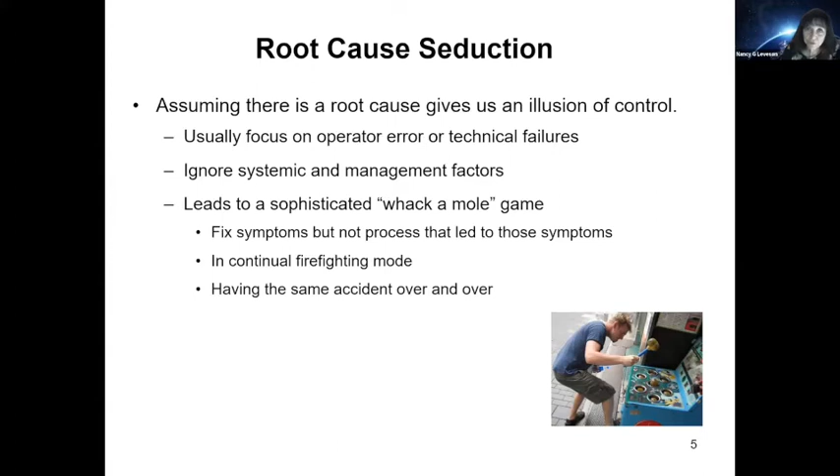And what that leads to is a process where we fix symptoms, but not the real cause of those symptoms. So we're in continual firefighting mode. We're continually putting out fires and having the same accident over and over again. In fact, in any accident, there's almost always operator error, flawed management decision-making, flaws in the physical design of the equipment, safety culture problems, regulatory deficiencies, and flaws throughout the safety control structure.

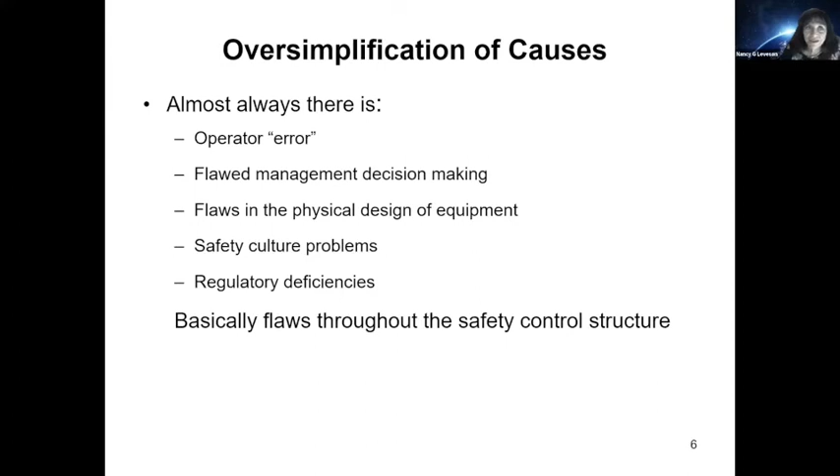And of course, you're probably all familiar with that because so much attention was focused on the Fukushima Daiichi nuclear power plant accident and all the things that went into it. And just blaming that on an operator or on the failure of the power to come on misses the most important factors, which were cultural, government, and other kinds of flaws.

There was a man, Jerome Lederer, who is considered the father of aviation safety. And he said that system safety covers the total spectrum of risk management. It goes beyond the hardware, and it involves the attitudes and motivation of designers and production people, employee management rapport, the relationship of industrial associations among themselves and with the government, human factors in supervision and quality control,

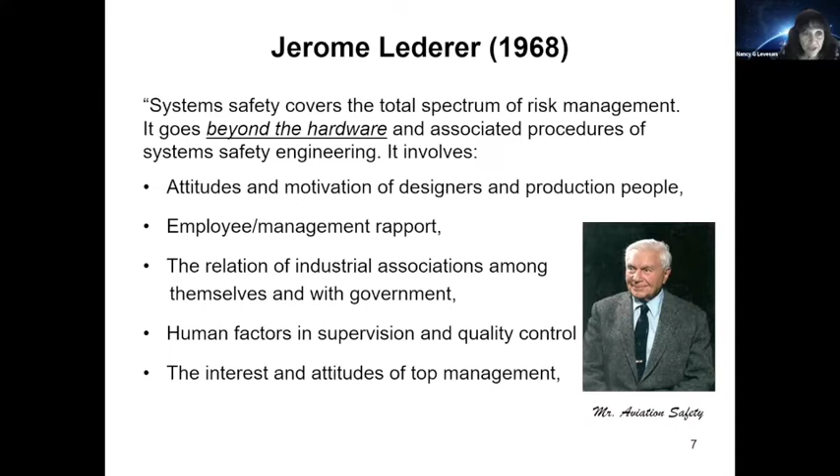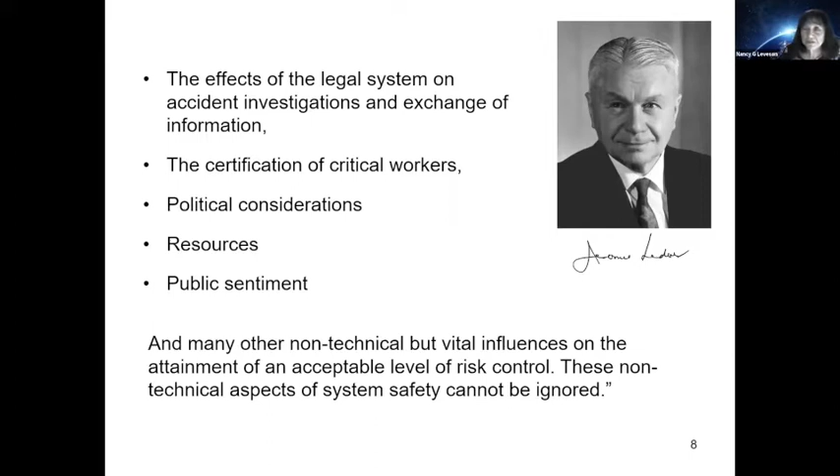the interest and attitudes of top management, the effects of the legal system on accident investigation, the certification of critical workers, politics, resources, public sentiment, and many other non-technical but vital influences on whether we are able to gain an acceptable level of risk control. And it's very important that these non-technical aspects not be ignored, or we will not be able to prevent accidents. There's also something called hindsight bias.

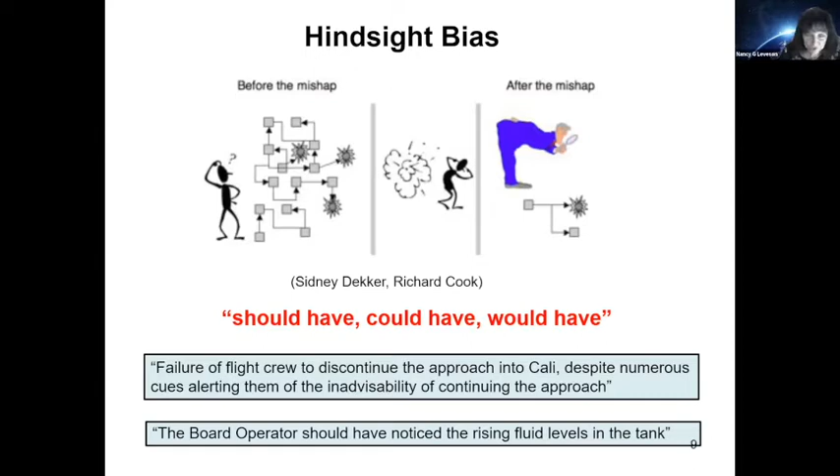So after an accident, it's very easy to see where people went wrong, what they should have done. It's easy to judge people for missing a piece of information that later turned out to be critical. Easy to see what people should have seen or avoided, but it's almost impossible for us to go back and undo what we know in our mind, understand how the world looked to somebody that doesn't have knowledge of the outcome. So to learn, we need to identify not what people did wrong. That gives no useful information. We need to ask, why did it make sense for people to do what they did?

Most people, 99% of people, do not get up in the morning and say, oh, good, I'm going to work. I'm going to kill myself and other people today. They're all trying to do the right thing. Everybody is trying to do the right thing. So the question we want to know is, why did it make sense to them at the time to do what turns out in hindsight to be the wrong thing?

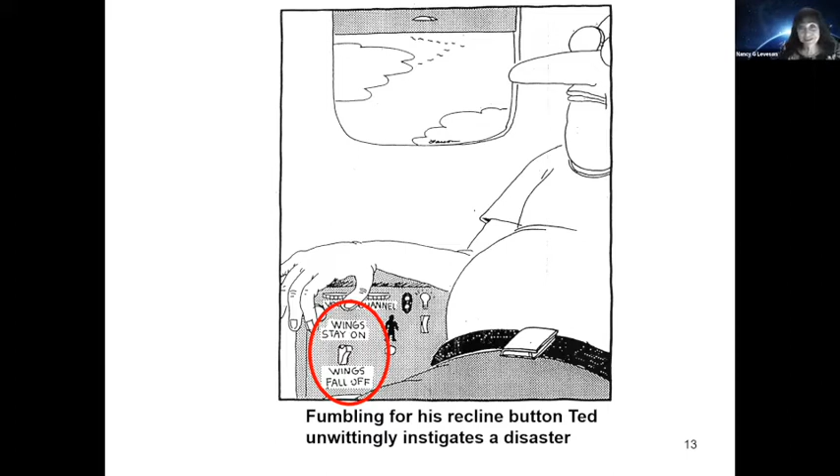The new systems view of operator error says that operator error is a symptom. It's never a cause. All behavior is affected by the context in which that behavior occurs. But the role of operators in our system is changing. They're supervising rather than directly controlling. They're supervising automation. Systems are stretching the limits of comprehensibility. They're so complex that even the engineers don't understand them all. So why would the operators be able to? We are in fact designing systems in which operator error is inevitable, and then we blame the accidents on the operators rather than on the designers.

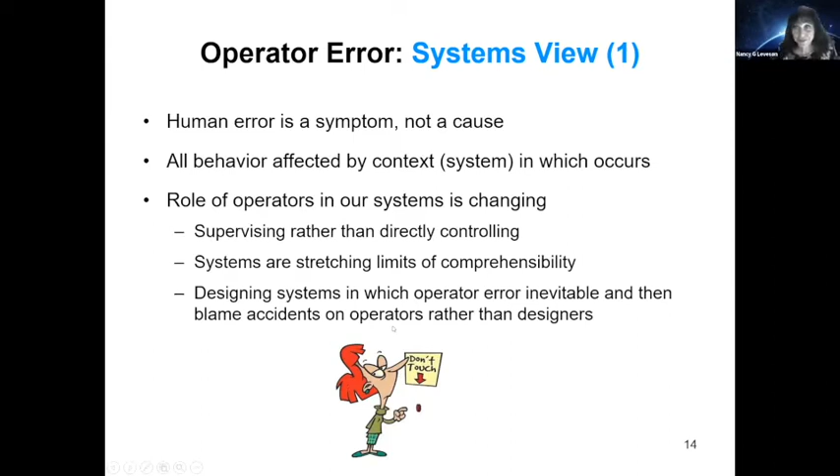So to do something about error, we need to look at the system in which people work: the design of the equipment, the usefulness of the procedures, the existence of goal conflicts and production pressures. In fact, I conclude that human error is a symptom of a system that needs to be redesigned.

Here's another example of an accident report. This was the Cali aircraft accident. Failure of the flight crew to revert to basic radio navigation at the time when the flight management system, that's the software-assisted navigation, became confusing and demanded an excessive workload in a critical phase of flight. Do you see what's being said here? It's the flight crew's fault for being confused, instead of the fault of the software for being confusing.

That doesn't make much sense. It is not going to solve our problems because the flight crew died, and we can't punish them. It doesn't make any sense. We need to fix the navigation software.

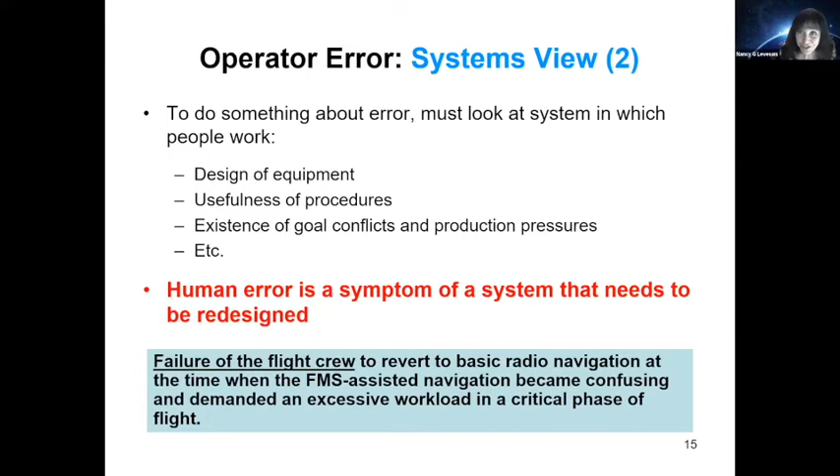In fact, blame is the enemy of safety. The goal of courts is to establish blame. The problem is when you focus on blame, people stop reporting errors, information is hidden, everybody points at everyone else. It's someone else's fault, not mine.

I can't get this to work on my screen.

Learning is inhibited. And so while it may make us feel good to find somebody to blame, we don't learn when we do that. The goal of engineering is to understand why accidents occur in order to prevent them. We need to leave blame to the courts, to the legal system, not engineering. It doesn't help us to find blame.

There are two possible goals in any investigation. We can identify someone to blame, or we can find out why the accident occurred. The first I call the accusatory approach. We focus on who and why they did what they did. To find out why an accident occurred, we need to look at what happened in the accident and why, and not to focus on who or who to blame.

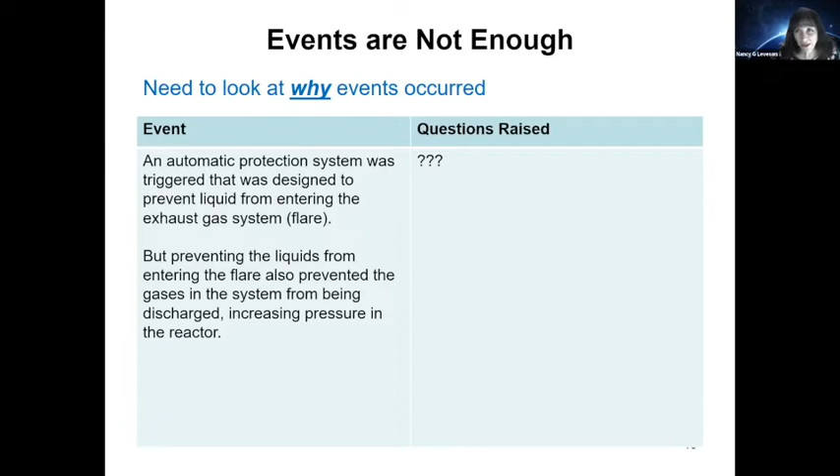There are all kinds of questions that arise. Did the operators notice this? Was it possible to detect this? Did their instruments show any of this information? Why didn't they respond if they did know? This seems like a predictable design flaw.

Was the unsafe interaction between the two requirements, preventing liquid from entering the flare and the need to discharge gases to the flare, identified in the design or hazard analysis efforts? If it was identified, why wasn't it handled in the design or in the operational procedures? If it wasn't identified, why wasn't it identified? It's an obvious flaw and an obvious hazard.

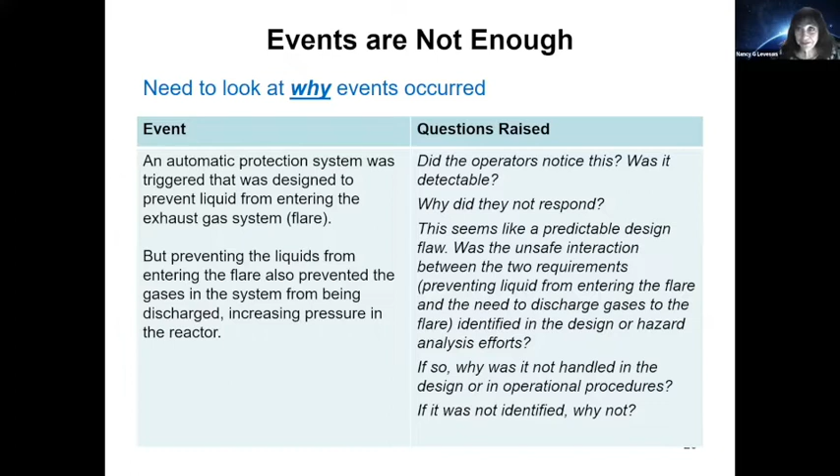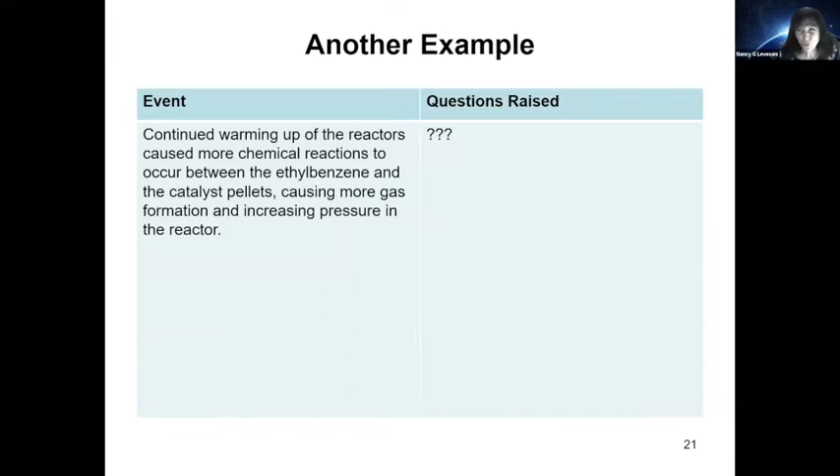Here's another example from the same accident. The event was that the continued warming up of the reactor caused more chemical reactions to occur between the ethylbenzene and the catalyst pellets, causing more gas formation and increasing pressure in the reactor. Again, that's just what, but it doesn't tell us why. So we need to answer these kinds of questions.

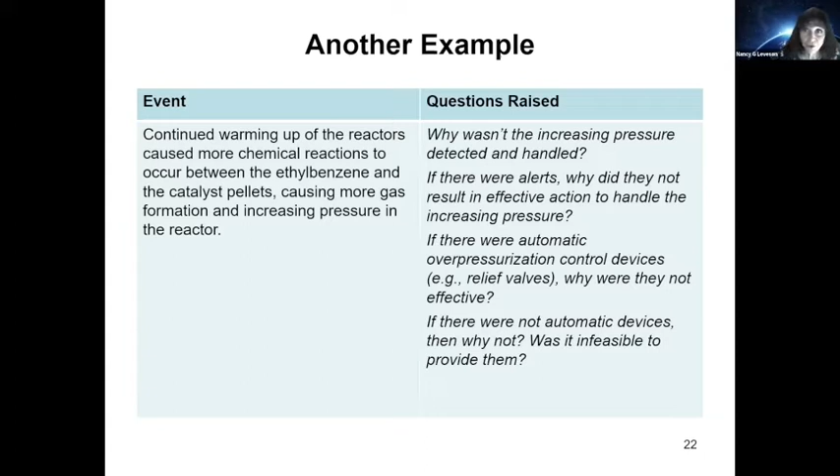Why wasn't the increasing pressure detected and handled? If there were alerts, why did they not result in effective action to handle the increasing pressure? If there were automatic overpressurization control devices, for example, relief valves, why didn't the relief valves work? If there were not automatic devices like relief valves, why weren't they included in the design? Was it not feasible to provide them, or did someone just make a mistake? Those are the kinds of questions we need to answer.

Let me give you an example of a real accident. This is a workplace accident. It was a large manufacturing plant, a company manufacturing large things. I can't give you the details, but they were assembling a large complex product. There was a specific part that wasn't available when they needed to put it in, so a decision was made to add it later and not slow up production.

The part finally did arrive, but to get that part into this thing they were assembling, they had to disassemble a large piece of the product. So how could they do that? Well, they needed scaffolding. So they had some scaffolding created during the shift before this one. And when they went to remove that large piece to put in the new part, the scaffolding kept it from being removed.

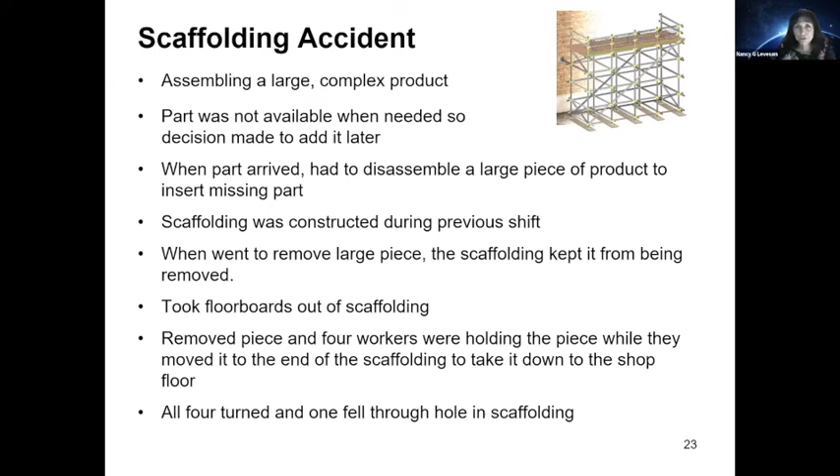They couldn't take off that part, that big door. It was actually a big door. So what did the workers do? Well, they took floorboards out of the scaffolding so they could open the door. They removed that piece, and 4 workers were holding the door, the piece, while they moved it to the end of the scaffolding to take it down to the shop floor. All 4 turned and 1 fell through the hole in the scaffolding.

So the company accident report used a causal analysis tool, really useless thing that lots of people use and probably many of you use. And it came up with the answer. The error was that the workers stepped in a hole. Well, that's pretty obvious. We know that. Why? Well, they said they made a mistake and they had a lack of situational awareness. Well, of course they made a mistake. They stepped in a hole.

That's a mistake. The lack of situational awareness basically is just fancy language for saying they didn't know that the hole was there. Well, of course they didn't know that the hole was there. They wouldn't have stepped in it if they'd known it was there. So clearly this is not useful. This is providing no useful information except that we can blame the worker, which is what they did.

They identified the root cause as worker error and the lack of experience in doing the job. They hadn't done it before. They didn't know there was a job aid for this job. And they didn't perceive any unusual risk and didn't ask for help. The recommendations then, and that's all the accident report said.

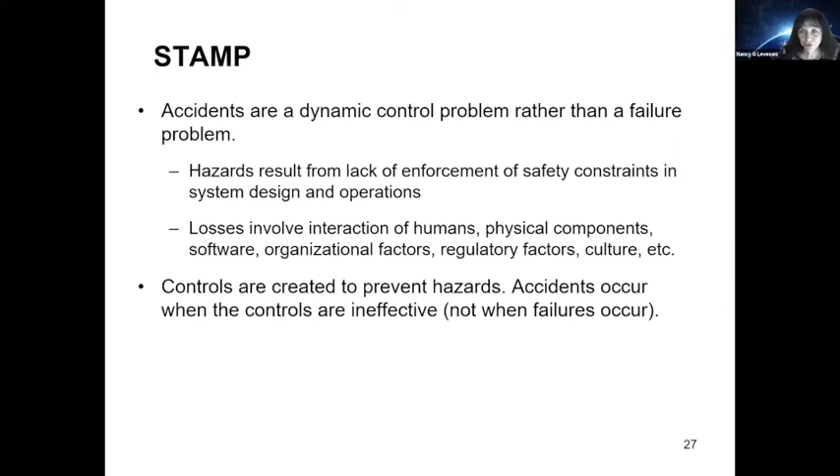Controls are created to prevent hazards. Accidents occur when the controls are ineffective, not when failures occur, but when we don't have controls for those types of failures. So CAST is an accident analysis method to help increase learning from accidents and incidents.

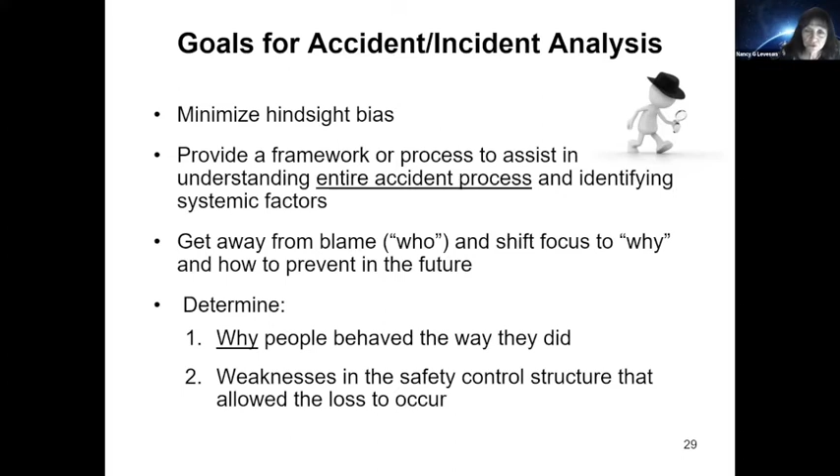Its goal is to minimize hindsight bias, to provide a framework or a process to assist in understanding the entire accident process and identifying systemic factors, not just providing an excuse to blame the operators. It tries to get away from blame, who, and to shift the focus instead to why and how to prevent it in the future. We need to determine why people behaved the way they did and the weaknesses in the safety control structure that allowed the loss to occur.

It's a structured technique that helps to generate the questions to be asked. And it's a change from what we do now. The goal is not to start to look for failures or human error. The goal instead is to ask, why didn't the designed controls prevent the accident? We all try to prevent accidents. There are lots of controls provided, government oversight, there are rules, there are all kinds of policies. Why weren't these effective? And what changes are needed in the controls to prevent future accidents?

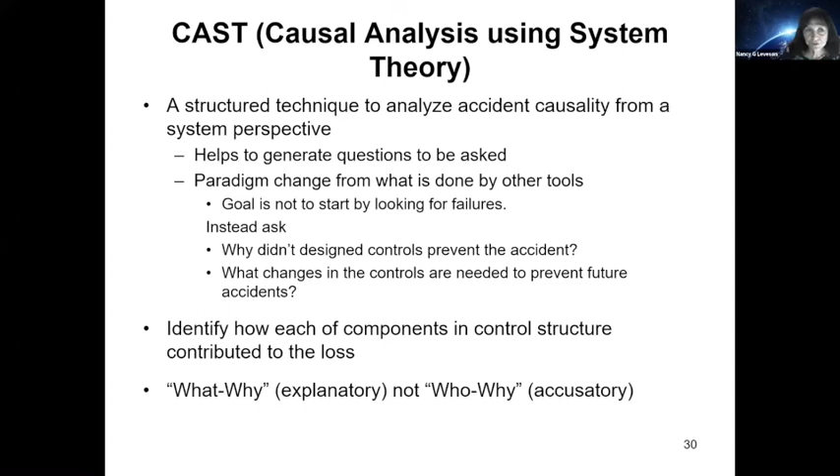We need to identify how each of the components in the control structure, everybody involved, contributed to the loss. And I already said the last one. So there's 5 steps in CAST. It is a structured process with a set of steps, and you go through those steps and then get the answer. So you need to first figure out where the system boundary is, what hazards, what constraints, what events did happen. We do need to start from events, what the physical loss was, and so on.

Then we build a model of the safety control structure, how accidents are controlled, and then analyze each component in the loss, the contributions to the accident, what mental model flaws. Humans have models in their heads of what they think is going on. And accidents often occur when the mental model is different from the actual, real physical system. We need to look at the context in which decisions are made and again, generate questions.

Then we need to identify the control structure flaws, and that may involve communication, coordination, the safety information system, the culture, the changes and dynamics in the system that have occurred, economics, environmental constraints, and so on. And we actually do have, if you're interested, one of my Japanese students did a CAST analysis of Fukushima Daiichi. And what you find is that the whole structure of the nuclear power system and controls in Japan were flawed. And of course, you know that lots of changes were made after the accident. And then at the end, you create an improvement program with recommendations and feedback.

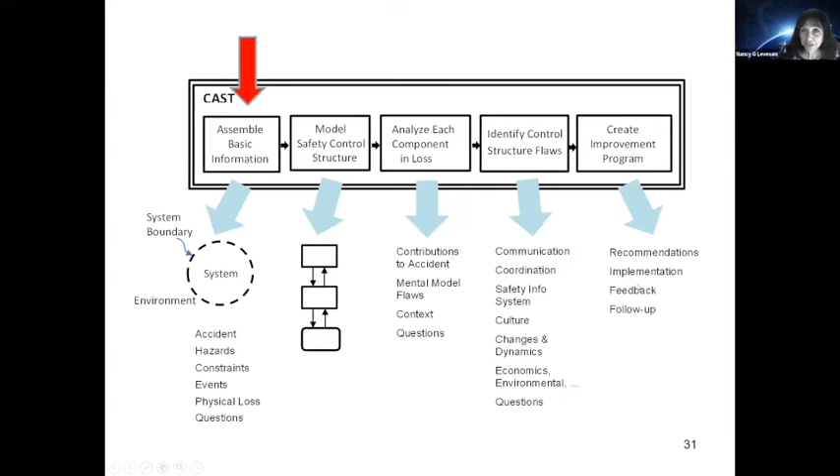So I don't have time to go through all the details, but this is an accident in a chemical plant. This is the one I was talking about. It was a Shell plant in the Netherlands. And there is a chemical process here, and above it there was an automated process control system. There were also operators who were interacting with the automated system, but also controlling the chemical process directly. There was safety management in the plant.

There was plant operations. Above them, Shell Global has Projects and Technology, which actually designed this plant. They have safety management. They have above, like any company, executive management. At the same time, there was oversight in the Netherlands. The government agencies oversaw operations in the plant. And above them is the European Union, and they have rules and procedures. The oversight agencies also oversaw emergency management, state and local emergency management and public health, which, here's a picture of the explosion, went into effect after the accident.

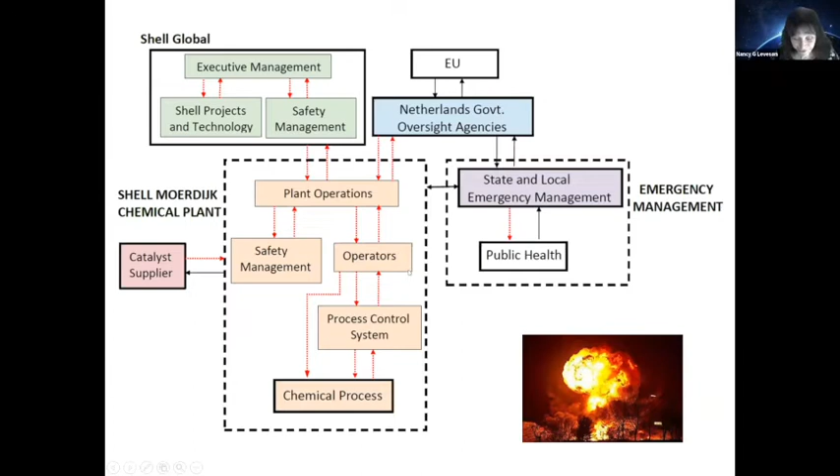And in fact, if you look carefully at the accident using CAST, you find that every single one of these things contributed to the accident. And though the operators are mostly blamed, they had the least impact, in fact, on the actual accident cause.

So we start by looking at the hazard, exposure of public or the workers to toxic chemicals, and the constraints that must be enforced. The workers and public must not be exposed to potentially harmful chemicals. Measures must be taken to reduce exposure if it occurs. Means must be available, effective, and used to treat individuals inside or outside the plant.

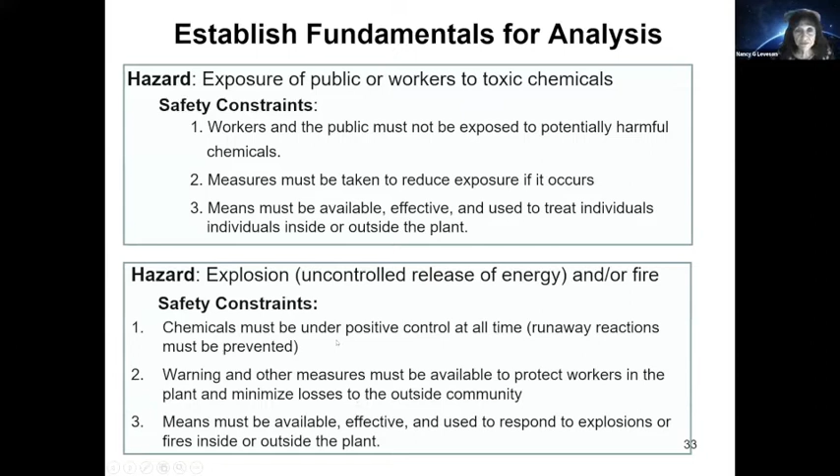A second hazard is just explosion or fire, and chemicals must be under positive control at all times. There must be warning and other measures available to protect workers in the plant and minimize losses to the community. And there must be some means to respond to explosions that actually occur.

In CAST, there's a format that you look at, and you take each component of the system, like the process control system or safety management, and identify their responsibilities, the unsafe control actions that occurred, what did they do that contributed to the accident. But then we don't stop there. That's where most people stop, we say they didn't do, or they did X and it led to the accident. But that's only where we start in CAST.

We also have to look at the context. Why did that behavior occur? What were their mental model flaws? What did they know in their minds that caused them to do the wrong thing? There has to be a reason they did the wrong thing. Everyone in this plant wasn't negligent and unskilled. They were very highly skilled.

And for the control structure as a whole, we have to look at what happened with coordination and communication between the different components. What about the industrial and organizational safety culture? How did that impact this accident, contribute to it? What about the safety information system?

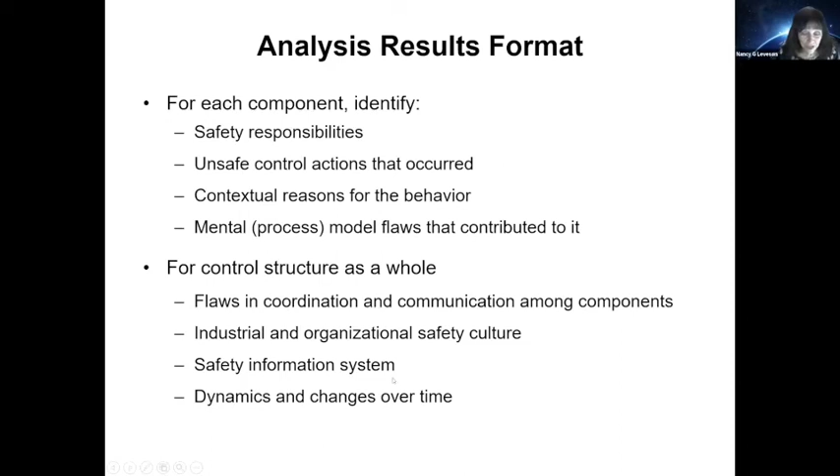It turned out that they had assumed that this accident wasn't possible. So they gave it a probabilistic risk assessment of 0. Couldn't happen, except it had happened twice before in Shell plants, actually in Southeast Asia. What? If it happened twice before, it can't be 0. But they assumed 0, so they didn't try and prevent it. That's crazy. Something is happening here in terms of getting information around the company that needs to be distributed. And there were dynamics and changes over time.

So as I said, there were inadequacies found throughout the safety management system. In the physical design, there weren't the right kinds of relief valves. You saw at the beginning, they had the flare closed to prevent liquids from getting into the flare, but that also prevented gases from getting in. You saw those. The process control system, the automated system, turns out was designed not to handle this kind of problem.

The accident occurred during a startup, after a turnaround, after a large maintenance action. They start restarting the plant. And it turns out that is when most accidents occur in chemical plants, during startup or during shutdown, but mostly startup. The process control, the automated system, was purposely programmed not to help the operators during the startup, which is the most difficult time. Why? I never could figure out why.

The operators acted appropriately, or at least understandably, given the context that they had. They had incorrect work instructions, which they followed. Workers are blamed if they follow the instructions, even though the instructions are wrong. That's ridiculous. Why were the instructions wrong? They were not trained to do a startup. There's required skill and knowledge in doing a startup by the rules of the company. None of them had those skills and knowledge. They'd never done it before, but nobody provided them with assistance from somebody who had done it before.

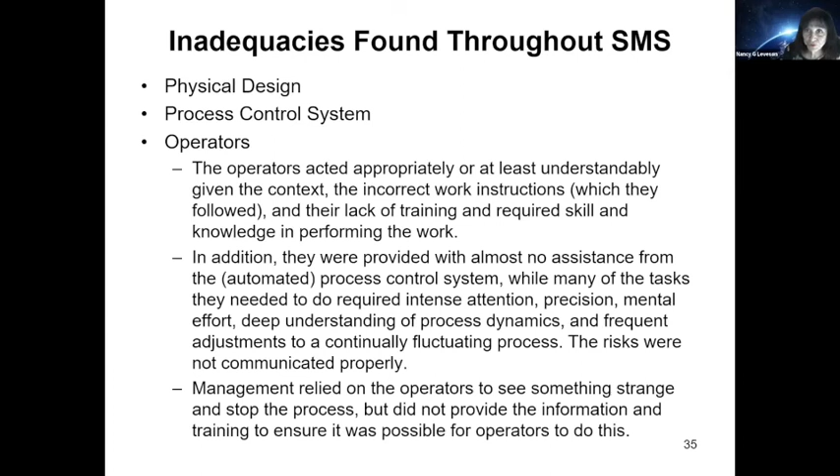So there were problems in the plant safety management. They were the ones that assumed it was zero risk, and then said, well, my probabilistic risk assessment is zero. There were problems in operations management, in the Shell designers, in Shell management, corporate management, executive level management, in the manufacture of the catalyst, which reacted badly to the ethyl benzene.

Dutch regulators didn't provide oversight because this plant had been so good in the past, they didn't think they needed to provide oversight during this very dangerous operation. Emergency services actually worked pretty well. They were the one group that actually did their job pretty well. And there were flaws in the interactions among it.

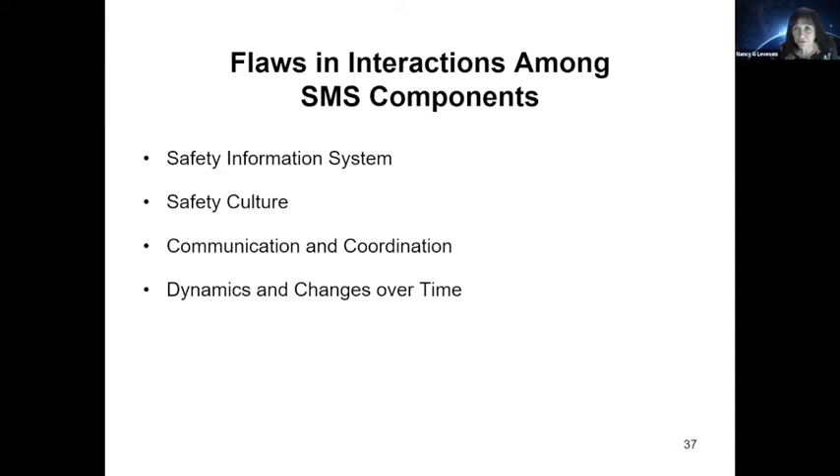As I said, the safety information system was incorrect, the information that Shell had about safety. The culture was very flawed. There were communication and coordination problems. There were changes over time, which there always are before accidents. So unless we understand this whole thing and all of these factors, if we just blame the operators, we don't learn anything.

The model we use in accident or incident analysis determines what we look for, how we go about looking for the facts, and what facts we see as relevant. This linear chain of events model promotes looking for something that broke or something went wrong in the sequence of events. They usually identify the point where an operator error, supposed error in hindsight, occurred, or something physically broke, as in this case.

So they blame the operators when the operators in this accident were probably the least responsible for it. Unless we look further, we limit our understanding, and we almost guarantee that future accidents related to the same factors are going to occur again. The symptoms may be different. It may not involve a catalyst and ethyl benzene the next time. So we don't see that this is actually the same accident with just different symptoms. The goal should be to learn how to improve the safety controls and not to find someone or something to blame.

And we need to use accident analysis processes like CAST that avoid root cause seduction and oversimplification, that minimize hindsight bias, that are explanatory rather than accusatory, and that emphasize a broad contextual view of human behavior. Why did the person think it was the right thing to do at the time? So CAST provides this structured process for learning more about accidents. It helps you generate the questions that need to be answered during the investigation and identify the information that needs to be obtained. So that's my talk about CAST.

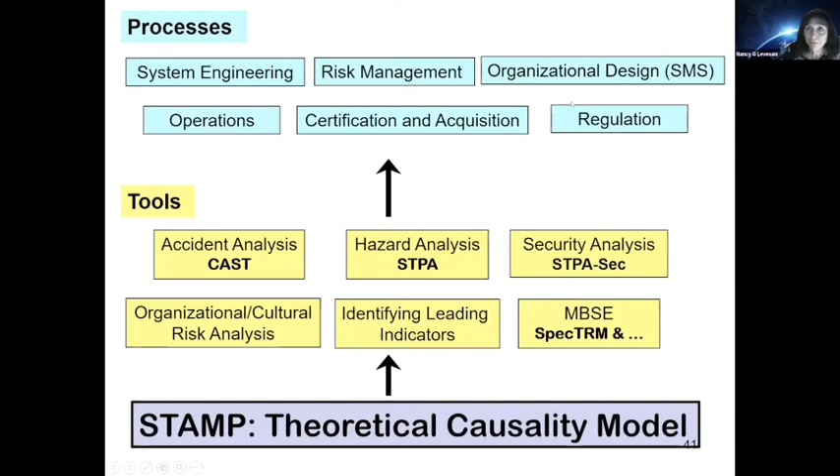I want to make a couple comments because I find a lot of confusion in the world. So let me explain some of the confusion I see. A lot of people, oops, that should have been CAST, think that you should combine STPA and CAST, or STPA with additional analysis techniques. And so they propose, well, we should do STPA and fault trees, or STPA and failure modes and effects criticality analysis, or STPA and whatever, attack trees, which are just fault trees.

The problem is that, in fact, if you look at it, we can show this empirically, I can show this mathematically, and we can show this actually in practice. The STAMP-based analysis tools are much more powerful than the traditional analysis tools.

So the scenarios generated by STPA are more than the scenarios generated by the old traditional hazard analysis. It makes no sense to spend a lot of resources. In fact, they're more expensive to do the traditional ones, to waste a lot of resources to find the same things that you would find with STPA. It's just a waste of resources. You can do it. I don't care. I just don't want people to waste their time and energy, because then you can't do as good a job. So it makes no sense.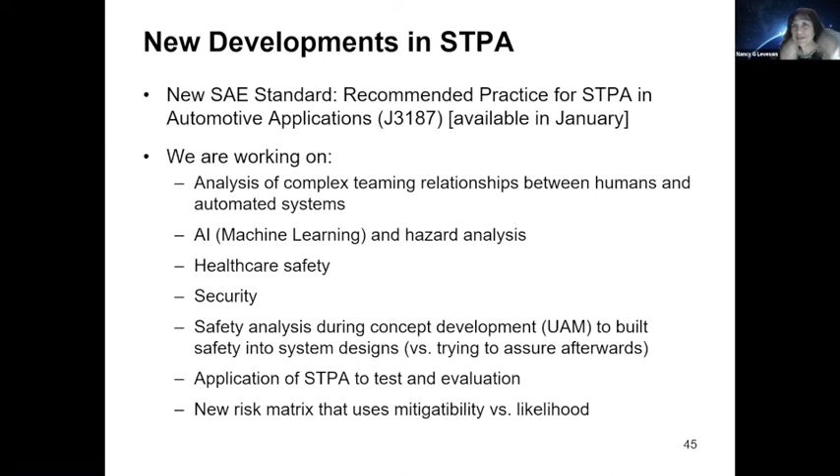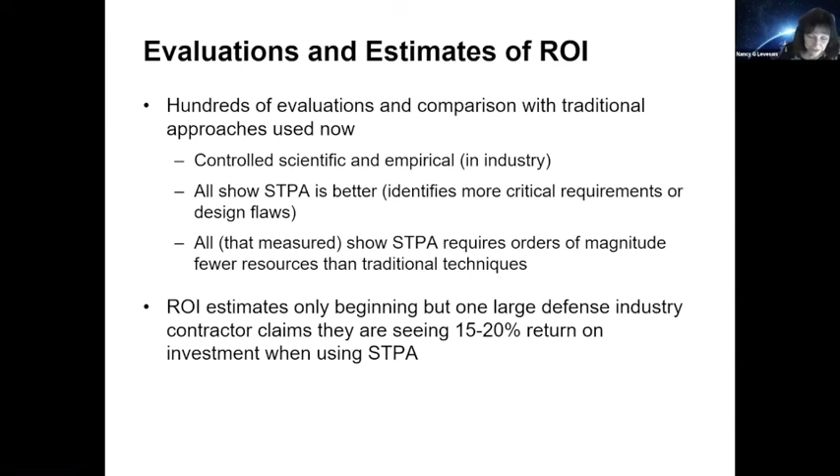We're only now starting to see return on investment estimates. Companies don't like to report these, but one large defense industry contractor claims that they're seeing 15 to 20% return on investment. That's 15% to 20% of the entire cost of the program when they use STPA. Why? Because you find errors early and you don't put them into the design. You design a safe system from the beginning. Much of the cost of development is in trying to back up. When you find an error, you have to go back, and that's astoundingly expensive. So you want to find things as early as possible.

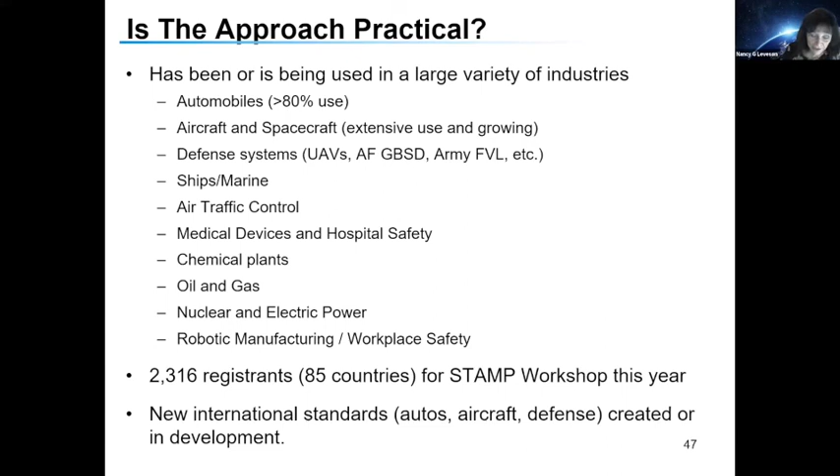In our last STAMP workshop last June, we had 2,316 registrants from 85 countries. This is now being used by thousands of people. It is not just a university, my little thing. It is now being used everywhere, and there are new international standards, as I said. So I'm finishing.

There is a website. You can get lots of information and you can get some free books. First is my book, which was published, but you can get a free download. And I'm sure they'll publish this presentation on the conference website, so you can get these URLs. The STPA handbook was put up on the web in March of 2018. It's had more than 100,000 downloads in the last 2.5 years. It's been translated into Japanese, Chinese, and Korean versions. The CAST handbook is newer, and we don't have a count of downloads, but it's been translated into Korean and Japanese, and these are all available at this website.